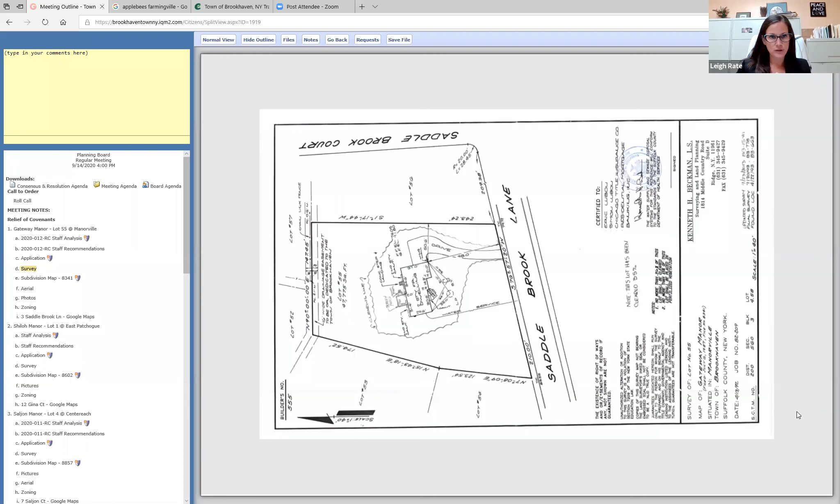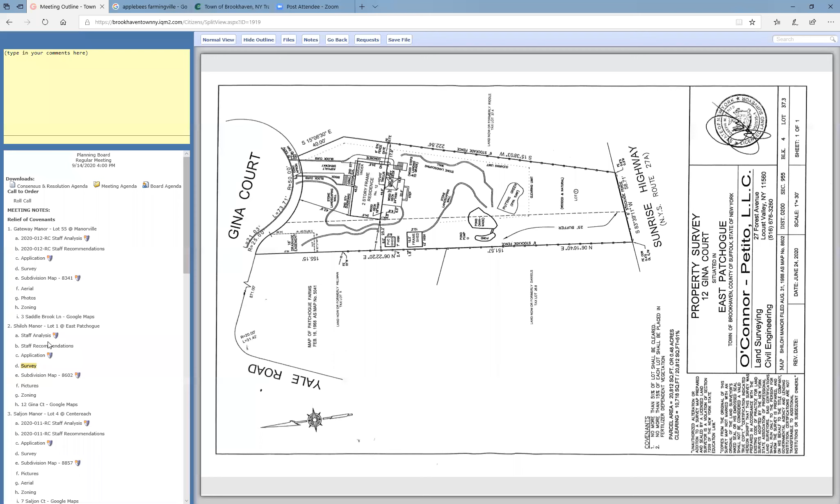Counselor, do we know if Mr. Woods is back on item number 1? I'm on item number 1 as well. Andrew Malguinera, are you representing Mr. Wood? I am.

Okay, please raise your right hand. Do you swear or affirm to tell the truth, the whole truth, and nothing but the truth, so help you God? Yes. Did you hear the staff, you have a copy of the staff recommendations? I heard. Okay, and are you in agreement with those? We're okay with that.

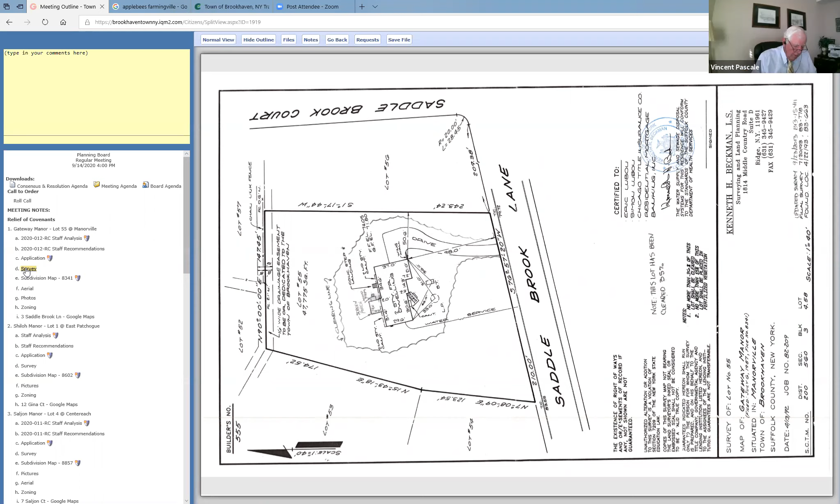Is there any board members have any questions? No. Okay, may I have a motion? Mr. Chairman, I make a motion to close this public hearing and place the matter on the decision calendar.

Motion by Ms. Dunn, second by Mr. Smith. Mr. Zarcone, I vote aye. Ms. Kelly, I vote aye. Mr. Walutis, aye. Mr. Rose, aye. Chair votes aye, motion carries 7-0.

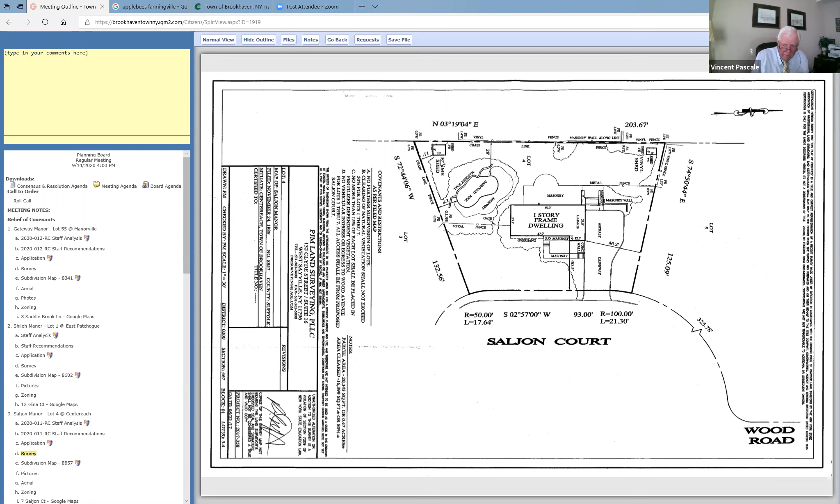Thank you, Commissioner. Is the applicant present? Mr. Malganara, you're representing this application as well? I am. Okay, did you receive a copy of the staff comments? I did. Do you have questions or concerns, or do you agree with those items? Absolutely, we're good.

May I have a motion on item number 3? Mr. Chairman, I will make a motion to close this public hearing and place the matter on the decision calendar. Motion to close by Mr. Rose, second by Mr. Smith.

Mr. Zarcone, I vote aye. Ms. Kelly, I vote aye. Mr. Walutis, aye. Ms. Dunn, aye. Chair votes aye, motion carries 7-0. Thank you. Have a good night.

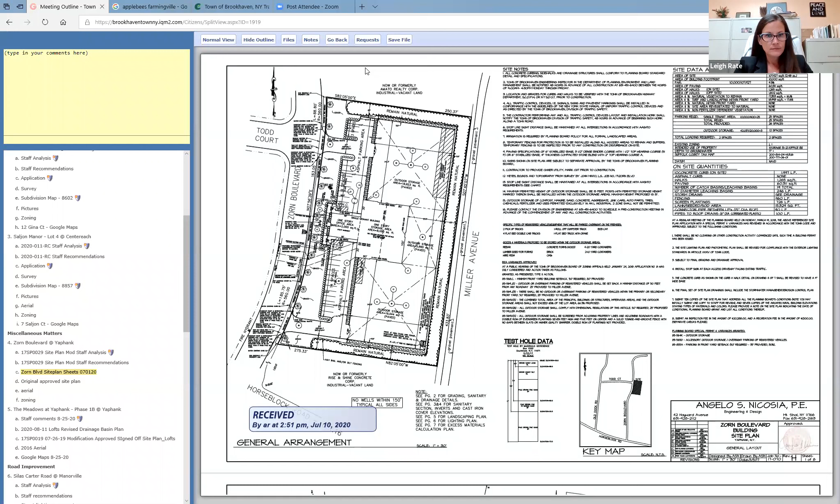Counselor, Ms. Rate? Sorry, I was on mute. Eileen Rowan is not here, I think I have Jeff Volmuth for it. I'm at least going to bring him in to ask. No, I'm actually here for the Lofts. I made a mistake, Leigh, sorry. Okay, so which number is that? Which number was a Lofts modification? Meadows, oh the Meadows, okay. I'll bring you in at that time, Jeff. Thank you, okay, I apologize. That's okay, I'd rather bring you in to make sure. Thanks. Okay, so we have the representative for item number 4.

Angelo Nicosia, is he in there, Leigh? He's the other one on the... No. I'll leave it open, we'll go on to the next one. I have someone here for 5. I don't have anyone here for number 4. Okay, let's move on to 5, I'll come back to 4.

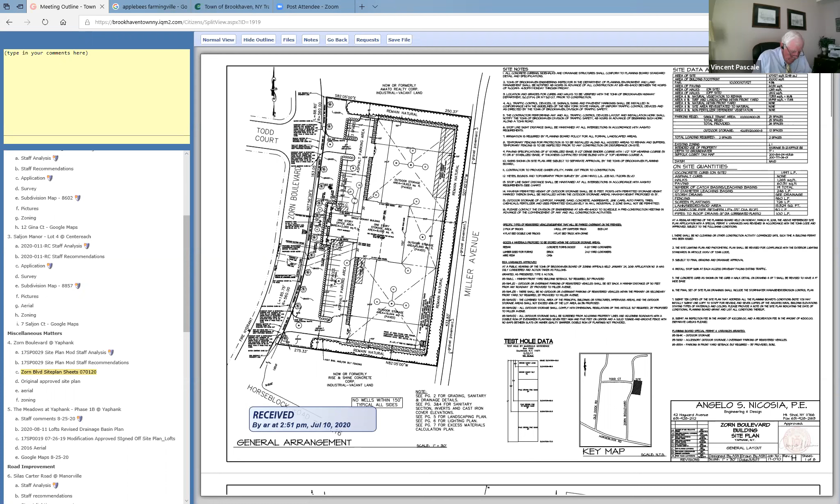The Meadows at Yaphank, Phase 1B at Yaphank. Yes, I'm here, back on again. I just want to read into the record the applicant, through the application, Mr. Bowman. This is the Meadows at Yaphank Phase 1B.

The requested modification is that the current design of the village green at the Lofts apartment community is not in conformance with the intent of the PDD zoning. The intent of the PDD zoning was to create an area with a sense of place where people can gather and enjoy the green space. Its current design is as a drainage basin, which prohibits the types of uses the PDD was looking to encourage. On the screen you can see this is the green area, and here's all your drains. The staff analysis agrees with the applicant that the intent of the PDD was to create a village green, and therefore they're recommending approval of the revised village green stormwater design modification. So that's this area. Thank you, Commissioner.

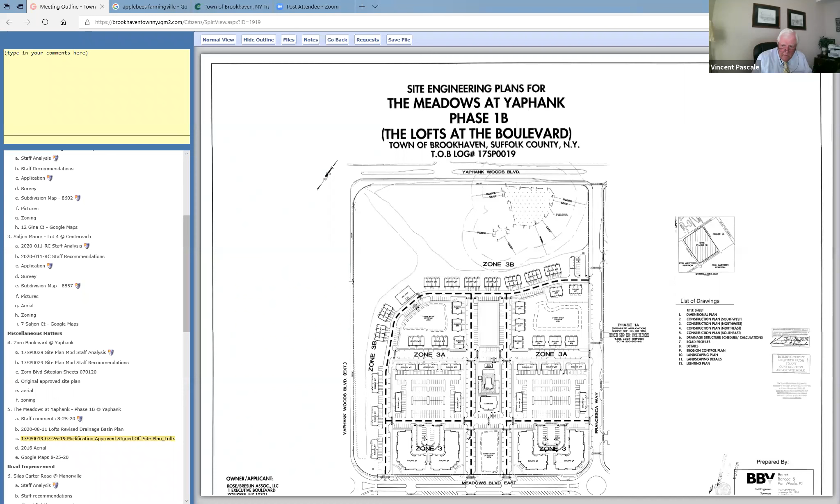Mr. Bowman, please raise your right hand. Do you swear or affirm to tell the truth, the whole truth, and nothing but the truth, so help you God? I do. Okay, you want to speak on the application? Sure, I actually thought Brian Ferrajari was going to be here. He's probably... yes, somewhere, Brian's on the line as well. Okay, he's going to probably be upset if he's not allowed to present, so let him present. No, okay. Is he going to speak? I'll be happy to, Mr. Chairman. There you go. You're not an attorney, are you? No, I'm not. Okay, well I can't see you, but raise your right hand. Do you swear or affirm to tell the truth, the whole truth, and nothing but the truth, so help you God?

Yes, I do. Okay, you want to present the application to the board? Sure, no problem. Good evening, Mr. Chairman and members of the board. My name is Brian Ferrajari from AVR Realty, representing the applicant. With me this evening is Jeff Volmuth from the firm of Volmuth and Brush, who prepared the plan revision before you. As you know, Phase 1B of the Meadows at Yaphank, consisting of 295 apartment units, is currently under construction. This phase contains a vital element of our PDD concept, that being the Village Green.

During construction, it became apparent that the design of the Village Green was not conducive to its original intent under the PDD zoning, which is to provide a sense of place for people to gather and enjoy open green space. In its current design as a drainage basin, the Village Green does not present an attractive place for people to get together outside of their apartments. In an effort to correct this, we asked Volmuth and Brush to design an alternate drainage system so that the Village Green can be raised as a level surface, creating an attractive public space while remaining compliant with the town's drainage requirements. This revised plan is the basis of our application this evening. We have reviewed the staff analysis prepared by planning and are in agreement with their findings. That concludes my presentation. Jeff Volmuth and I are both here to answer any questions the board might have.

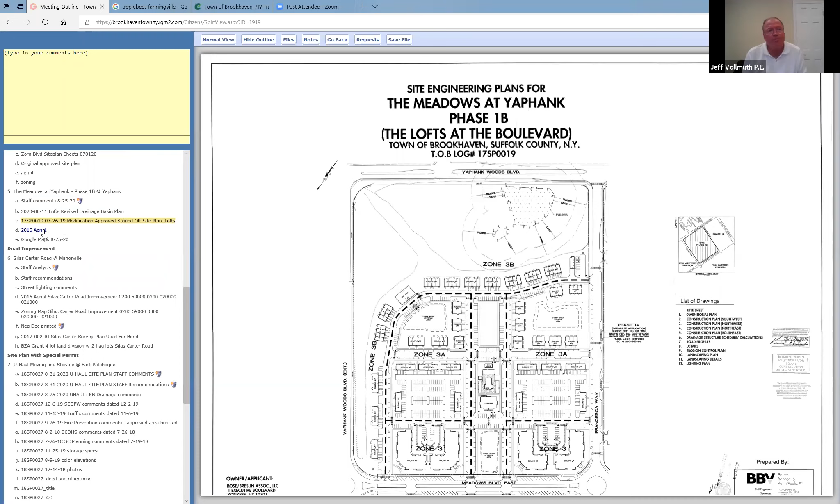Any board members have questions? A couple of questions, Mr. Chairman. This is Richard Smith. What are the dimensions of that green area? Hang on a second, I have the plan, just give me a moment.

Is it flanked by roadways that have inline parking along the sides of it? The east side is flanked by parking. Both sides have parking, parallel parking along the side of it.

It used to be a relatively shallow overflow. It wasn't a recharge basin, it was a surcharge area. So to explain the design, when the lofts was originally designed, we were limited to 5 inches of storage subgrade, providing 3 inches of surcharge flooding at grade. The 3 inches was accommodated in this low point.

So we're replacing that 3 inches with leaching pools instead, and that allows us to fill the low point. At the time, that's what staff wanted. Staff didn't want to let me provide the full 8 inches subgrade, but there's really no reason not to. And in this case, there are a number of reasons to change the way it was graded and flatten it out so that people can use it.

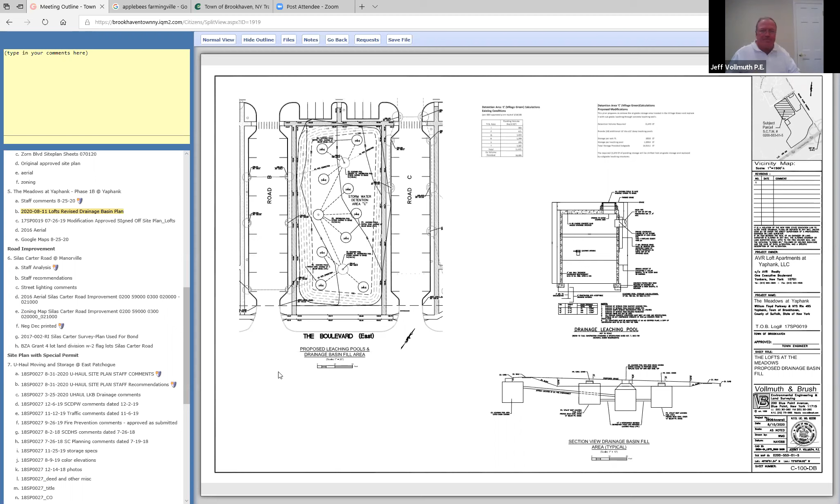Any other questions by the board? May I have a motion?

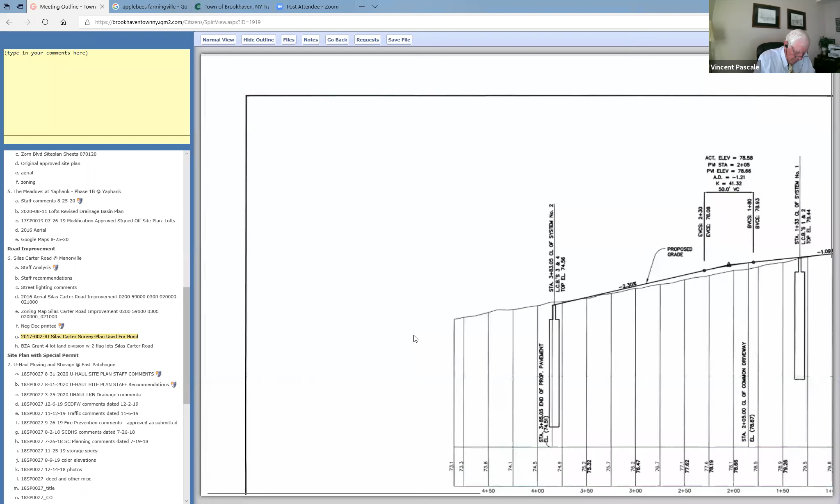Yes, Mr. Chairman, I would like to make a motion to close this public hearing and place the matter on the decision calendar. Motion by Ms. Reilly, I'll second that motion. This is Board Member Pete Zarcone, second one is Zarcone. Mr. Wilutis, I vote aye. Ms. Dunn, aye. Mr. Smith, aye. Mr. Rose, aye. Chair votes aye, motion carries 7-0. Thank you, gentlemen, thank you very much.

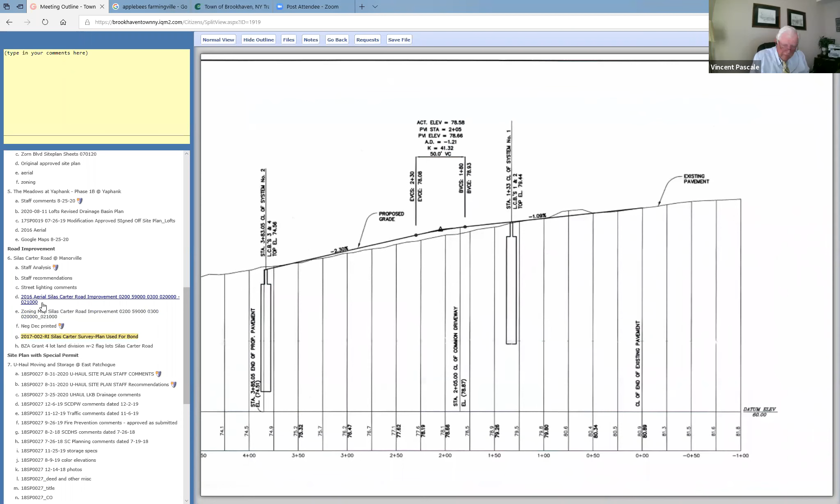Counselor, do we have the representative for Zorn Boulevard with us yet? No, I don't have anyone here for number 4 at the moment. Not available. Okay, let's move on to item number 6, Silas Carter Road at Manorville.

The location is on the west side of Silas Carter Road, 428 feet north of Jerusalem Hollow Road, which is not open. The proposal is to construct 400 linear feet of Silas Carter right-of-way to access 4 single-family homes on 10 acres. The applicant seeks road improvement approval for this right-of-way, including paving, drainage, curbing, and street lighting. Silas Carter is a paper street that has been extended over time and is currently cleared as a dirt road. Staff recommends approval of the revised plan dated 8/12/2020 with 12 conditions, including a bond submission last dated 8/25/2020.

Thank you, Commissioner. I see Vincent Pascale. Are you representing the applicant? Yes, I am the applicant. Okay, please raise your right hand. Do you swear or affirm to tell the truth, the whole truth, and nothing but the truth? Yes. Thank you. Okay, you want to speak on the application?

Well, we've had comments and it's been going on for quite a couple of years now, so we agree with all of the input from planning. I think it's straightforward, and I have an email from Eileen stating the same, so I'm in agreement with it as per the plan of Kenneth Bank.

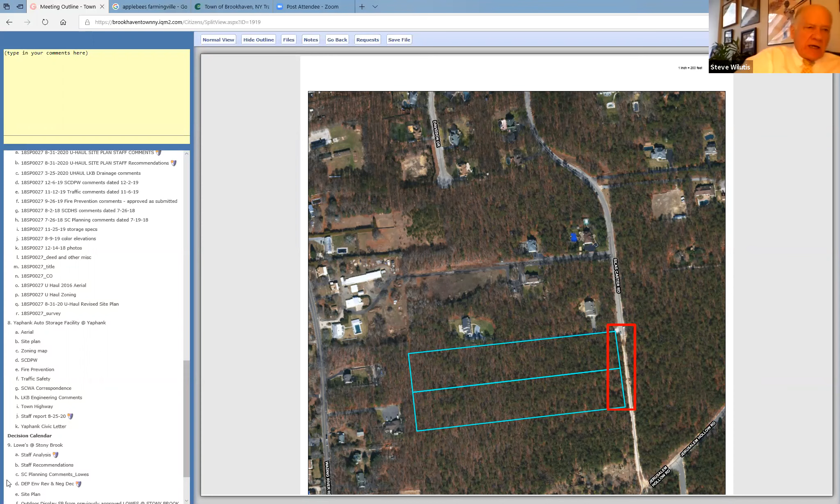Motion closed by Ms. Dunn, second by Mr. Smith. Mr. Zarcone, aye. Ms. Reilly, aye. Mr. Wilutis, aye. Mr. Rose, aye. Chair votes aye. Motion carries 7-0.

Thank you, Mr. Pascale. Thank you. Item number 7 is being held to October 19th. Item number 8, Yaphank Auto Storage Facility at Yaphank.

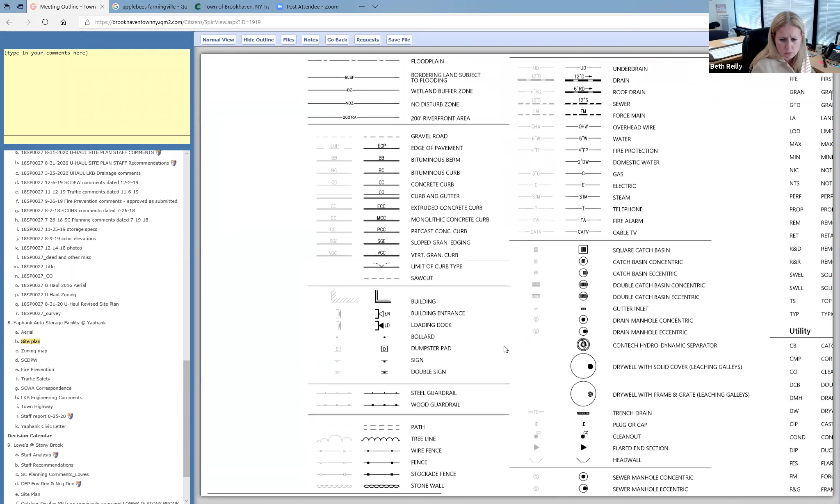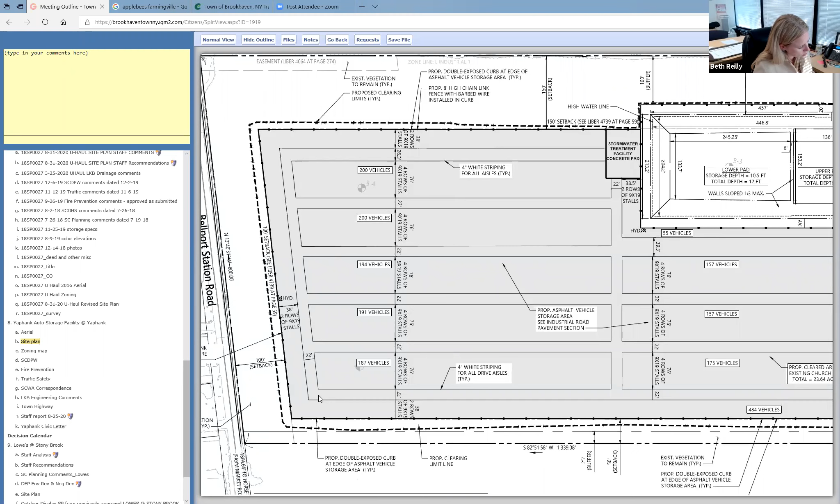There is no building proposed. Site improvements include an asphalt paved storage area with perimeter curb, a stormwater drainage collection system, and an on-site recharge basin as per town standards, a right turn in, right turn out single access drive on Sills Road, and an 8-foot high chain link fence with barbed wire around the perimeter of the vehicle storage area.

The plan proposes a 150-foot natural buffer to the north, a 100-foot natural buffer along the frontage on Bellport Station Road, a 100-foot landscaped and natural buffer along the Sills Road frontage, and a 50-foot natural buffer along the remaining property boundaries. Proposed land coverage upon completion: driveways, buildings, and pavement 21.47 acres, or 60%.

The property is adjacent to Bellport Station Road on the west, the Long Island Railroad tracks to the north, Baseball Heaven to the northeast, and Sills Road to the east. Adjacent to the south is the Suffolk County Water Authority wellfield and storage tank, and vacant wooded industrial property. It is noted that north of the railroad tracks are the rear yards of 9 residential dwellings fronting on Long Island Avenue. There is a special permit.

The criteria is contained within 85-569, and there are 12 of them. The applicant also seeks 2 planning board variances: minimum natural landscaped area in the front yard, 15% required, 7.3% provided; and parking in the front yard setback, 100 feet required, 50 feet provided at the church parking site.

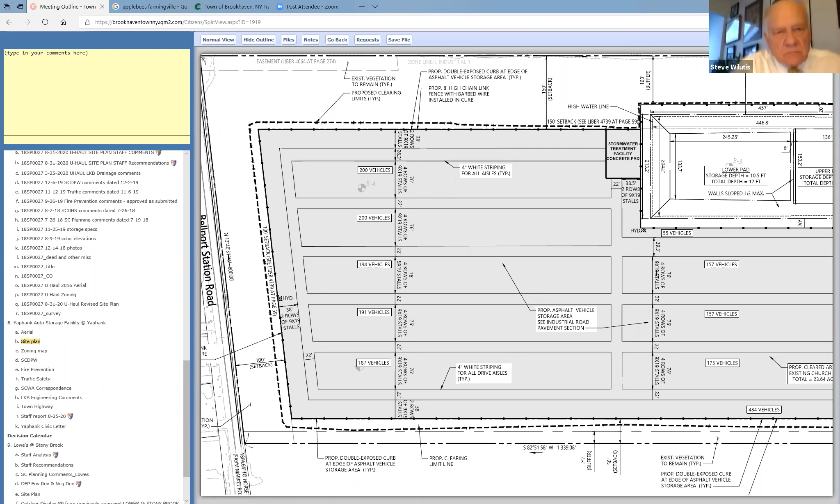The site is adjacent to Suffolk County Water Authority property, which contains the Patchogue Yaphank wellfield. The applicant proposes mitigation, including paved storage areas and a Contech hydrodynamic separator system with drainage catch basins that would collect debris and contaminants from the autos. After limited treatment, it would continue into the recharge basin where the stormwater would be recharged into the ground.

The Suffolk County Water Authority has serious concerns regarding the auto storage facility and its proximity to the wellfield, and recommended denial. Please refer to the Suffolk County letter dated November 8th, 2019. A traffic impact study was included in the DEIS. The Yaphank Civic Association has submitted a letter of objection.

A draft environmental impact statement was prepared and accepted as complete on Monday, October 7th, 2019. A public hearing was set for Monday, November 18th at 4 p.m. to consider the DEIS.

Due to comments from a November 8th, 2019 letter from Suffolk County Water Authority during the DEIS comment period and prior to the public hearing, the application was adjourned to a later date. This board adopted a request that a draft supplemental environmental impact statement be prepared. Since the 2019 DEIS, the proposed preliminary site plan has been revised, specifically concerning the stormwater runoff management system and treatment process, to provide enhanced stormwater treatment for the removal of a broad range of potential contaminants.

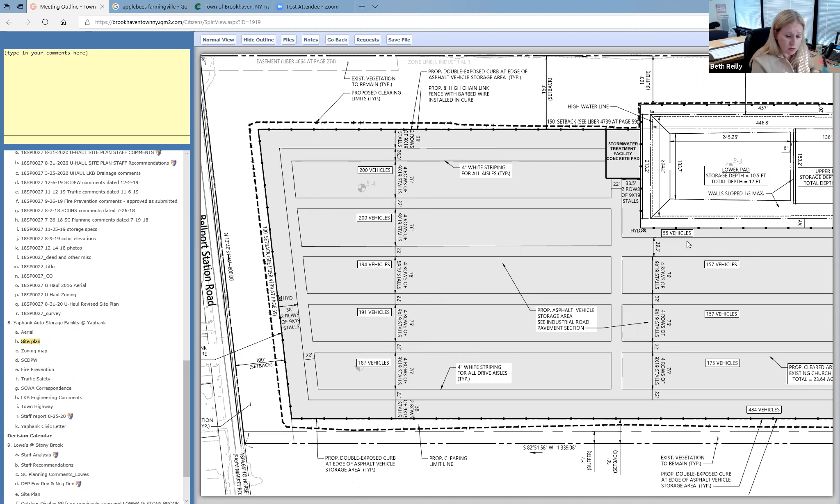So if you'd like, I have up the site plan. I have the zoning map. And any other documents that you need me to put up, just let me know.

Okay, thank you, Commissioner. Along with the letter from Suffolk County Planning, we received a number of letters. Ms. McCallion, if you're online, can you make those letters part and parcel of the public record? I'd like to make all of those records, the emails and everything, all public inquiries into this application, part of the public record.

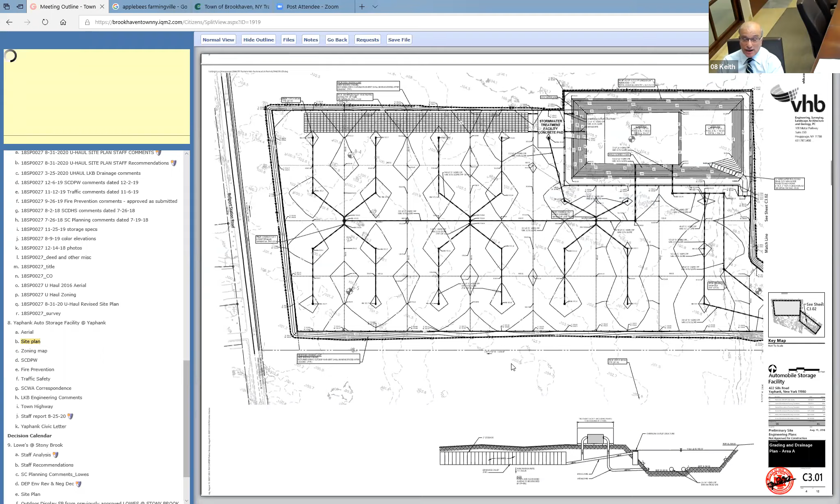Is the applicant present? Yes, he is, Mr. Chairman. Keith Archer, Harris, Bloom and Archer, 445 Broad Hollow Road, Melville, New York.

I'm representing the applicant. Good afternoon, Counselor. Good afternoon, Mr. Chairman, good to see you again. Nice to see you as well. Hope you're safe and enjoying the rest of your summer. You too, sir. Okay, now you can begin to entertain us.

Thank you very much. As I indicated, we represent the applicant in this request for approval, as the Commissioner so aptly described, of a 21-acre automobile storage facility on approximately 35 acres of industrially zoned land, bounded by Bellport Station Road to the west, the Long Island Railroad tracks to the north, Sills Road to the south, and the Baseball Heaven facility to the east in Yaphank.

The property is presently vacant other than the former Fishermen Church situated along the Sills Road frontage. The applicant's specific request, as Commissioner Reilly indicated, is for a special permit and site plan approval for the proposed facility, which will be used for the short-term storage of vehicles that have either been involved in motor vehicle accidents or been repossessed, but are otherwise owned by the insurance company and are awaiting online auction.

Those cars are auctioned online. There's no auction at the site. In fact, there are no live auctions. Minor relief is also being requested from the town's land development regulations.

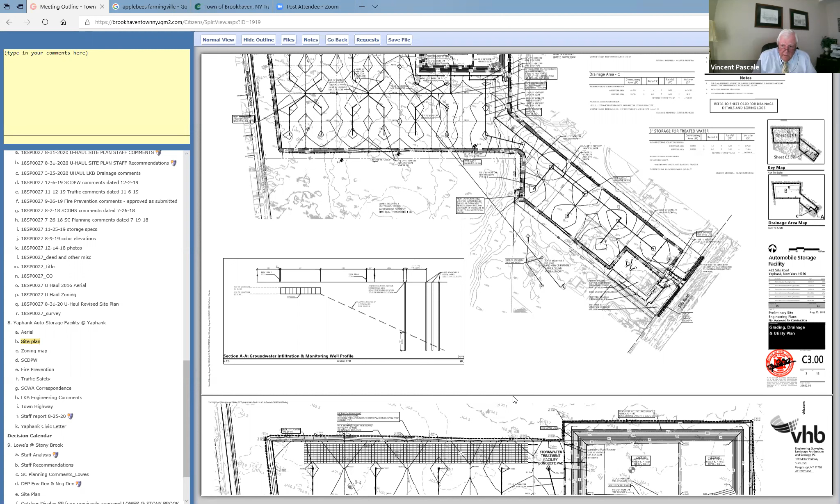Right, my scope of services is to focus on treating the water that is collected and brought to the treatment system. Anything that happens outside of that boundary, I'll hand off to one of my colleagues here. Okay, but there's also a good possibility that something not contained could spill over, so we'll let your colleague address that. Yeah, it's not my field of expertise, but yes.

Mr. Chairman, that will be addressed. If the board permits, I'd like to ask David Wortman from VHB, the preparer of the DEIS, to describe the broad scope of the DEIS, and also respond to your question. I'll also point out that we were in contact with the Yaphank Fire Department, and they indicated that they are able to cover whatever resources need to be dispersed to this property.

So if Dave Wortman can now describe the DEIS and the SDEIS, that would be great. That would be my pleasure.

Good afternoon, Chairman Pascale, members of the board. My name is David Wortman, and I am the Senior Environmental Manager for VHB in Hauppauge, New York. As you're aware, this is a public hearing on the site plan and special permit applications for the proposed facility, as well as a hearing on the draft environmental impact statement, or DEIS, and draft supplemental environmental impact statement, or DSEIS. I'll take a moment to briefly address the environmental review of the proposed project pursuant to the State Environmental Quality Review Act, SEQRA, for which this board is the lead agency.

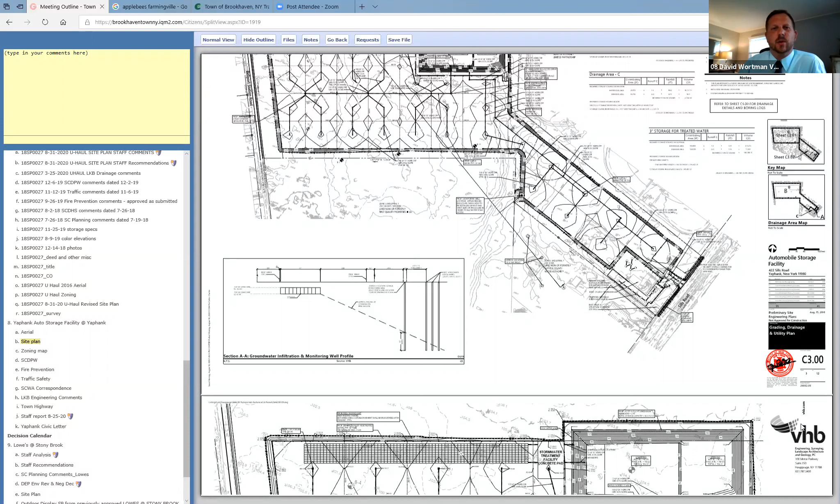Following the issuance of the positive declaration, VHB prepared a DEIS on behalf of the applicant to address a comprehensive range of potential environmental impact topics in accordance with your final scope, including potential impacts upon water resources, which we've heard a little bit about already, land use and zoning, ecological resources, traffic, which we'll hear more about shortly, aesthetics and visual resources, cultural and historic resources, noise and vibration, public health and safety, and climate change.

In accordance with the second positive declaration, the DSEIS comprehensively evaluated those topic areas, and a notice of completion was issued in July, accepting the draft supplemental document as complete and adequate for public review, which brings us here today.

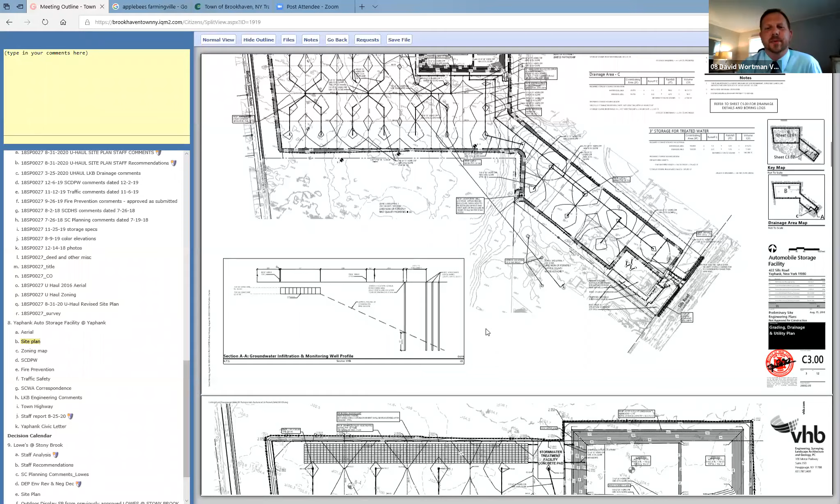The results of the various detailed analyses in both the DEIS and the DSEIS indicate that the proposed action has incorporated measures to minimize or eliminate potential impacts to the point that it would not be expected to result in a significant adverse environmental impact.

An important part of what we're here to do tonight, rather than to present, is also to gather substantive comments on those analyses contained in the draft EIS documents, which in accordance with the SEQRA process will then be addressed systematically in a final environmental impact statement, or FEIS.

So to that end, I'm not going to attempt to summarize all the results of those various analyses. They're available to the board, and they've been distributed by the town to all the involved agencies and interested parties, and they're readily available to the public. Instead, I just want to briefly highlight some of the key aspects of the DEIS and the DSEIS.

First, with regard to land use and zoning matters, the subject property is located within an expansive L Industrial 1 zoning district, which extends for long distances to the east, south, west, and northeast of the subject property, encompassing much of the Yaphank area of the town of Brookhaven. The district is extensively developed with numerous industrial uses, including various existing auto-related uses, light manufacturing, warehousing, distribution facilities, pharmaceutical facilities, offices. There's even a power plant.

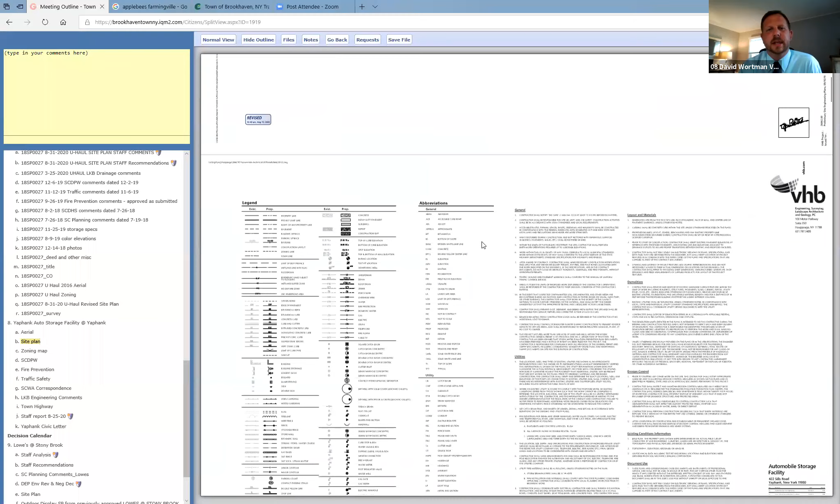The key elements of the proposed action is the retention of substantial areas of natural vegetation in the form of perimeter buffers that meet and exceed the respective land development standards for this site. Mr. Buttacavoli will explain that a little further when he describes the site plan.

But specifically at the west along Bellport, at the avenue frontage of the site, there's no driveway access proposed, and a 100-foot natural buffer is proposed to be retained. As you know, the site is currently wooded, so that 100-foot buffer will retain the natural vegetation and will virtually eliminate the potential for the proposed facility to impact the visual character of the surrounding areas there.

To the north is the Long Island Railroad corridor, followed by a relatively narrow A Residence 1 zoning district, approximately a quarter mile in width. That district is surrounded on three sides by that same L1 industrial district that our site is in, and on the fourth side, the north side, by the Long Island Expressway corridor.

To further minimize the potential for adverse effects on that district specifically, this proposed site plan increases the natural buffer at the north to a minimum of 150 feet, also virtually eliminating the potential for adverse effects on that portion of the surrounding neighborhood.

To the south of the subject property are additional industrially zoned properties, including a large undeveloped wooded parcel, the Suffolk County Water Authority water storage tank and wells that we've talked about, and a private learning center, a new interdisciplinary school, which will also be well buffered in accordance with the town's development standards.

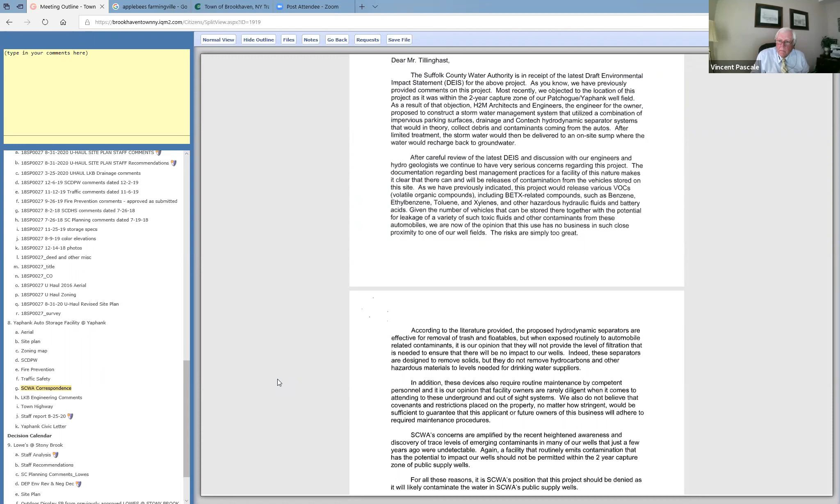Mr. Chairman, Dave Buttacavoli of VHB. VHB prepared the site plan displayed in front of us. Now that we have the background from our experts, I'd ask Dave to describe the site plan. The site plan changed from its initial submission date to the time we submitted the supplemental DEIS. I'll ask Dave Buttacavoli to describe that, because what changed was to facilitate the system Dr. Woodard described. Dave will describe the location and changes made, as well as some general site information we haven't already covered.

Dave? Dave, we can't hear you. Mr. Buttacavoli, please describe the plan. No, we see you, can you hear me? Yes, yes. Back? Okay, good. All right, I'll start again.

Good afternoon, Mr. Chairman and members of the planning board. My name is Dave Buttacavoli, and I'm a principal at VHB Engineering located at 100 Motor Parkway, Hauppauge, New York. As my colleagues just went through a number of the site features and issues addressed in both the documents and prior plans, I won't rehash what's already been covered, but I want to talk about the access and the buffers, and then get into the stormwater system and what Keith was alluding to when he talked about the changes.

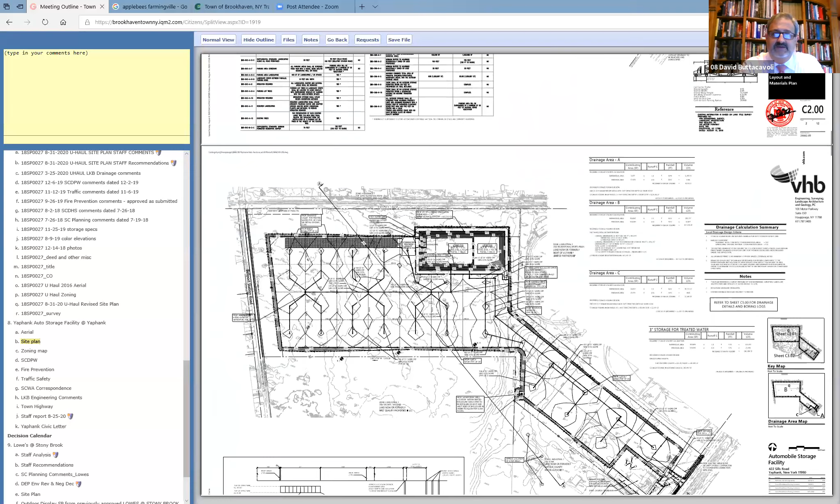So the decision was that the asphalt areas -- Beth, if you can go to the next one, the drainage plan, it should be in the set -- shows a number of different areas. Essentially the water is collected in catch basins. Stepping back, it's asphalt, and all the asphalt is pitched, as all asphalt is, to move the water to a location. Each of these areas collects water in catch basins, which are a closed unit. The water doesn't go anywhere; it goes into the unit and then through a pipe network.

Those networks then go into oil water separators, which both Steve and James chatted about, where things will be settled out. Once the water passes that, then it goes up into the basin.

That's the product of what Keith mentioned to change. Although it looks like a recharge basin, it's actually a lined basin, so nothing is recharging out of it. What's happening is the water flows into that, and then it's pumped up from the western side of that basin.

And then water is going up into the treatment center. It's being treated, then it discharges out into these leaching galleys. The leaching galleys are similar to dry wells or any other leaching galleys, but what we're actually leaching out is going to be almost clear reverse osmosis water, for all intents and purposes, to go back to what they talked about.

So the system itself and how it works, and one question, Chairman, is if there's over spray on certain areas. For the areas that are within this, anything that flows from here flows into these catch basins and gets to the same network, out to the same system, and then goes to the treatment facility.

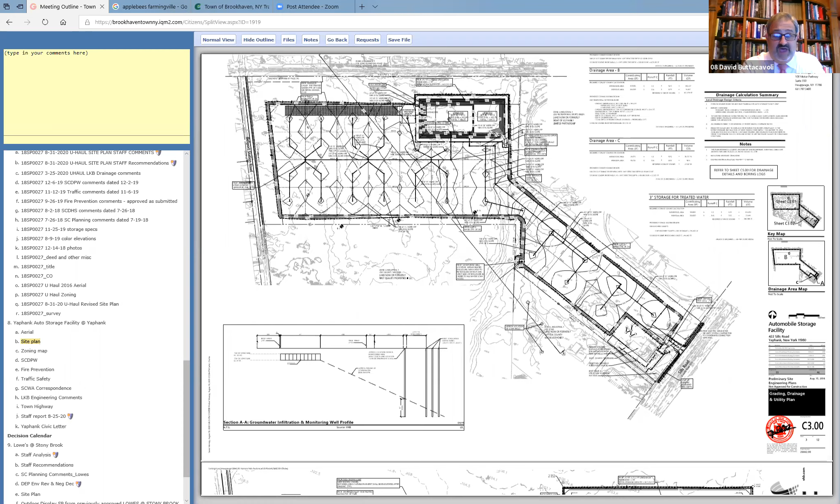So with that, I know there's going to be questions regarding the water, but I do want to just introduce Pat Lenahan so we can chat a little bit about the traffic.

I think that's it. Isn't asphalt more vulnerable to this type of contaminant or vehicular agents? So the asphalt itself, there are other additives we can put into it. But I would have to look and get back to you if there's something specific out there that would make it even less vulnerable.

Other than that, we could take some areas directly around the catch basins and make them concrete. I wouldn't suggest a whole lot that way, but there are certain points we could do that. I'd have to see if there's anything further regarding the asphalt.

Pat, you're up. Thank you, Dave. Can everybody hear me? Yep. Okay, good afternoon. I guess we're still afternoon.

Chairman Pascale, members of the planning board and staff, my name is Patrick Lenahan. I am the director of the Transportation Division at VHB's Long Island office in Hauppauge. As part of the draft supplemental environmental impact statement prepared for the project, VHB performed a detailed traffic impact study.

to evaluate potential impacts to transportation associated with the proposal. The TIS is included as an appendix to the supplemental EIS and was performed in accordance with the final scope of the DEIS and in keeping with standard traffic engineering practices and procedures.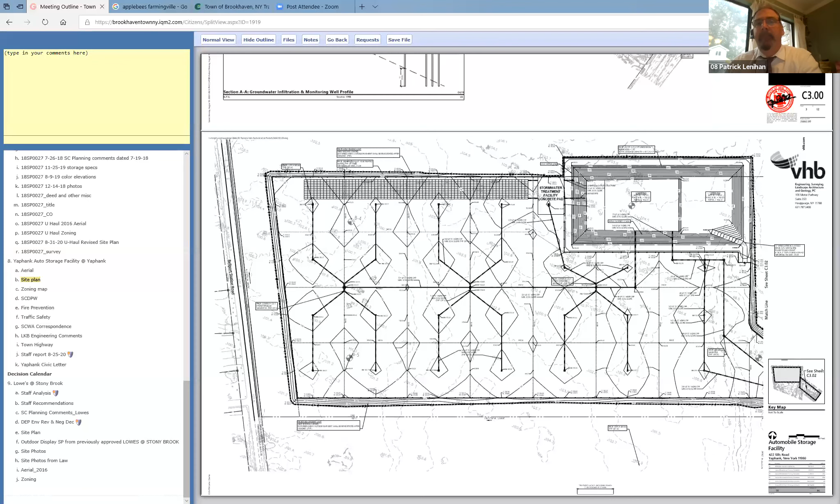The TIS evaluated elements such as existing and no-build traffic conditions, traffic safety, site access, future volumes, and capacity. The traffic study was accepted as part of the overall document for circulation and public comment and included review by town staff and the town's traffic consultant.

As per the final scope, the study evaluated a total of 23 intersections. We did submit a graphic on an aerial background that had a series of red and blue intersection dots. If that's available, that would be great.

If not, I would describe the scope of the study as the length of Sills Road from Bellport Station to the LIE, County Road 16 Horseblock from Bellport Station down to Sunrise Highway, Station Road from Sills down to Sunrise Highway, and a couple of intersections on Bellport Avenue, that's Long Island Avenue, and the south service road of the expressway. Those were included in the scope as there was concern expressed by the neighborhood on Bellport Road.

But I did want to mention that there is no access, as Dave said, on Bellport Avenue. In addition, there is a truck restriction on Bellport Avenue north of Horseblock Road.

So there will be virtually none of our traffic and absolutely none of our truck traffic that would even consider using Bellport Avenue. So based on the specifics of the operation of the site provided by the developer, it's been found that the operation as proposed will not cause significant negative impacts to traffic conditions on these roadways or at these intersections.

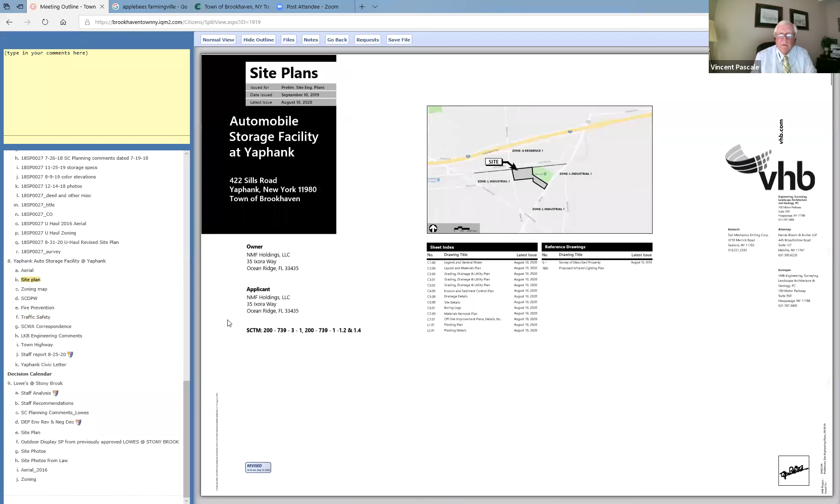I see a number of attendees. I don't know what they're related to. I've let Jean into the meeting. She had Jean Forster. Is your mute on? No, it doesn't appear to be.

Hold on just a moment. All right, I'm going to take Jean Forster out for the moment. She's from the Civic Association. She had some expert testimony that she wanted to bring in.

So give me a moment and I'm going to let someone else in for the moment. I didn't do that, did you? Okay, I'm not surprised. All right, Kathy. I have someone named Kathy that I've brought in at her request. Don't see them either.

Ms. Forster, I have you in the public meeting. You're sending me a message. I have you in the meeting, but you are not. We have you off mute and don't see you there. I'm going to try this. There's someone named Rachel May that I'm allowing into the meeting.

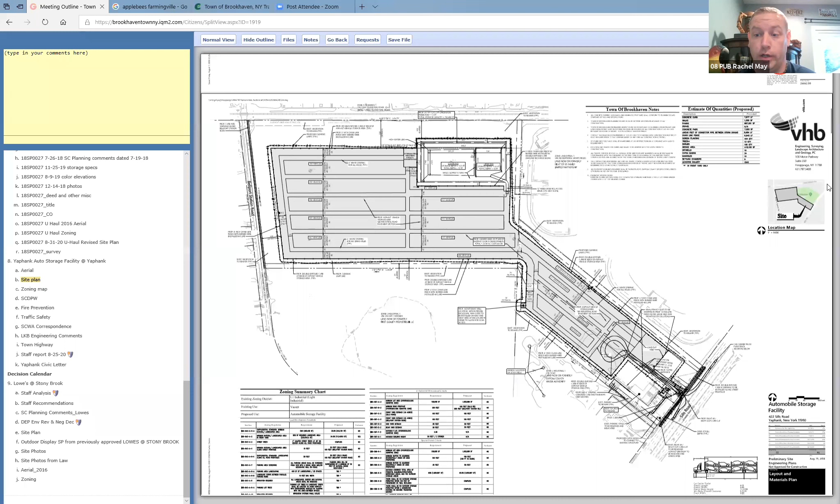All right, thank you, Mr. May. Regarding your concern about lighting spilling into your bedroom windows, you might want to contact the town, because the town has a code for dark sky compliance. If they're spilling light into your property, you should notify the town, they can check that out for you, okay? Sure, thank you. All right, thank you.

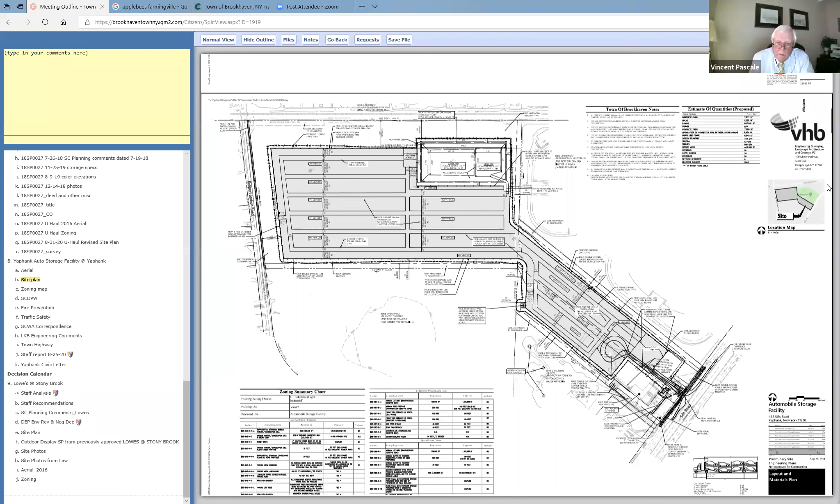Good afternoon, Ms. Lupfer. Can you please raise your right hand? You swear or affirm to tell the truth, the whole truth, and nothing but the truth, so help you God? I do. Okay, go ahead.

I've listened to your presentation, and just as the prior speakers, my neighbor Mr. May, and the other woman, Ms. Coleman, stated, traffic in our area has been adversely impacted by the other storage facilities that have been built over the past years here. And I heard what they said as far as access being only allowed on Sills Road, but I have questions regarding that too.

Especially since they did consult with the Yaphank Fire Department, in the event of a major emergency with one entrance in and out, how many emergency vehicles, number one, get into that facility since it's such a large parcel? Number two, I didn't hear, I may have missed it.

Is there any security planned for this facility? Because the one that Mr. May spoke about, which is directly behind us, we're on Long Island Avenue, and there's a facility directly behind us on the south side of the railroad tracks. They have some sort of security that patrols there 24 hours a day, it appears. And as he stated, the lights are on 24 hours a day.

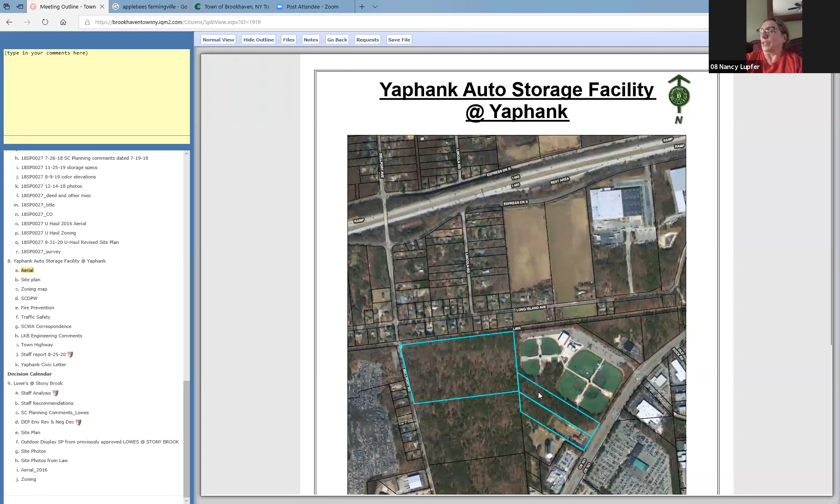Another major concern is - oh my goodness, my mind is blank - auctioneering. This was never proposed initially as a storage facility, but rather an auction house for the cars. So I wonder if now it's just being called something else and there will be auctioning going on. And many of the residents and neighbors were concerned about the sound quality and effects that it might have on the neighborhood. So I don't know if any of that stuff has been addressed, and I just missed it.

Well, when you complete it, when we come back, the applicant's gonna have to answer those questions. I'm sure Mr. Archer is taking notes as you're speaking.

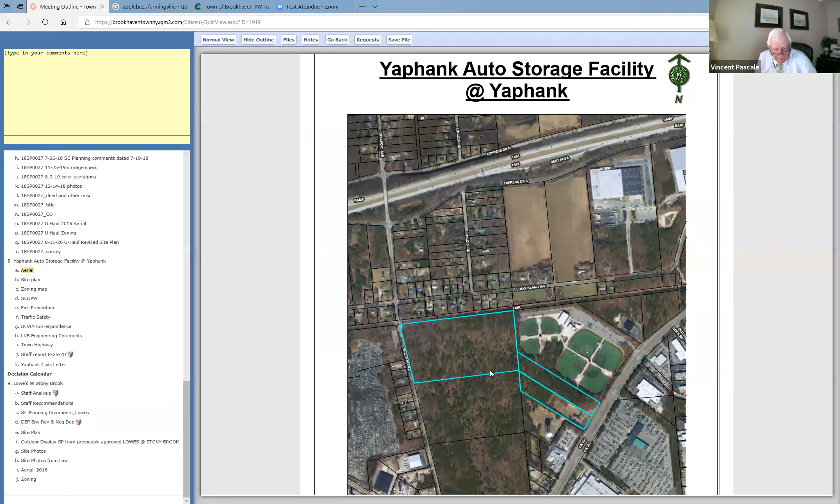Okay, and here on Long Island Avenue, some years ago, because the rate of traffic and the speeds that come down our street are so high, I applied to the town and it was approved to have the speed limit reduced to 35 miles per hour. I really wanted no truck traffic access on this road, and all that they were able to facilitate was no truck traffic except local deliveries. My question is, do they consider cars being delivered there as local deliveries to this storage/auction facility?

Very good question. That's a good question. We'll let Mr. Archer answer that.

You know, when I really requested that years ago, I asked that question and no one could really provide that answer for me. Because I think, right after Superstorm Sandy, I saw so many car carriers coming off the expressway, coming off Sunrise Highway, and cars were being placed in so many areas here in Brookhaven, Bellport, Medford. And I've always wondered for years now where those cars were sitting and what was the purpose. And it appears that now we're starting to see what's happening with all these cars.

I mean, as you guys well know, Gershow has taken over acres and acres of property just south of the Long Island Railroad here in Medford. And those cars sit there like they're waiting to go into some kind of battle. And I'm just curious, as a resident, what is really truly happening here? If anyone could really be honest.

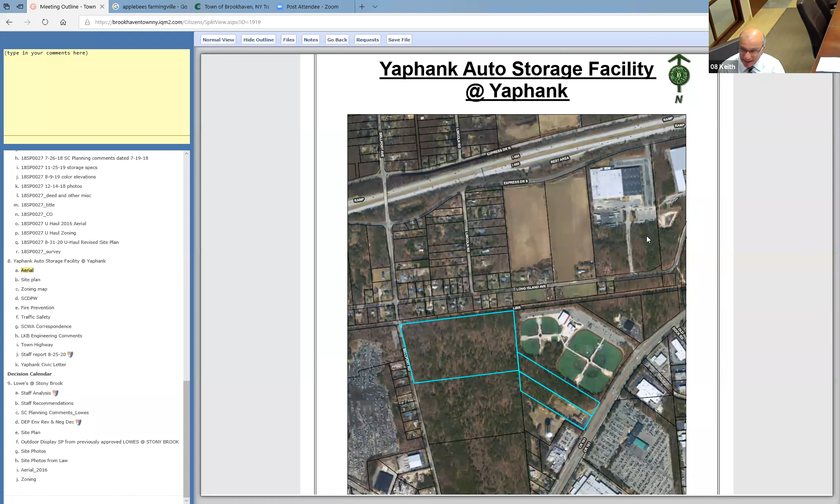Thank you, Lee. My second question is, it looks like according to the calculations, and you can tell me if I'm wrong, you have space for 2,416 vehicles? You know, when you do these EISs, you always look at what the max is. I'm not saying there are going to be that number of cars, Mr. Smith, but the requirement is that you look at the worst case scenario. I don't believe anyone believes there'll be anywhere near that number of cars, but it's in the EIS as the max, because that's what the EIS requires. Yeah, but there's no expectation that there'll be that number of cars.

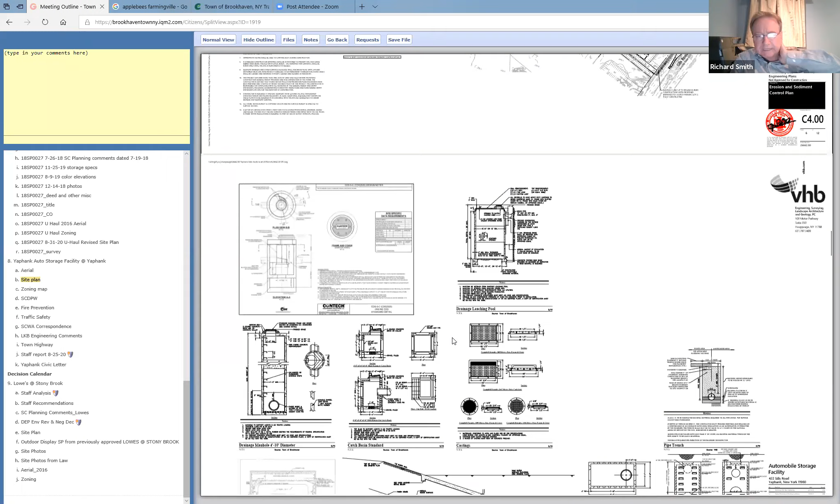I just counted the amount that was shown on that particular drawing. I think part of my question was answered. Somebody answered how the fluids are collected. Apparently the entire lot is going to be paved with asphalt, and then it's going to be pitched towards drains that go into a closed system, a sealed catch basin, and then into a treatment plant. But someone else pointed out that asphalt can be somewhat porous to certain materials. I just wanted to make note of that.

The condition of the vehicles coming here, what do you think the percentage is of cars coming here that are going to be damaged? Or are they just going to be regular insurance claims or what? From what I've seen in most of these sites, a lot of these cars sometimes are severely damaged.

I'm going to give you the information that I know. I think it's going to be a mix, Mr. Smith. I can't quantify the percentage of cars that perhaps would have been in some sort of accident versus those that were repossessed, or for some reason the dealer was assigned to the insurance company to auction it off. Unfortunately, I don't have that kind of breakdown. So that's sort of what you have: cars that have been possibly repossessed, some that may have been damaged, and some that are just being sold off. I think that's right. I think it's a mix.

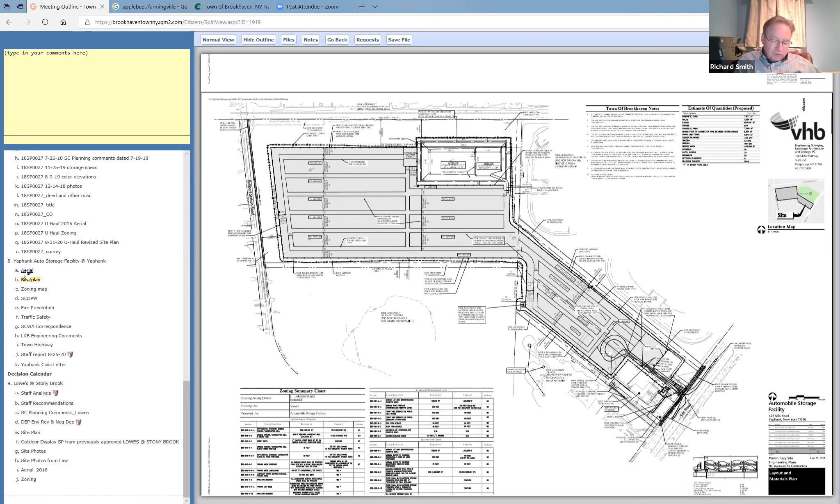I think it's a mix, and I can't quantify what percentage is allocated to each. I give this question to you and possibly other folks in the town who might know the answer. The three lots to the south of the lot you're looking to develop, do we know who owns those lots? Does your client own those lots, or are they under any type of site plan or thoughts at this present time?

I'll be happy to answer that, but Lee may know more than I do. To my knowledge, those three lots are not part of this application, and there is no application pending on that property. We happen to know who the owners are, only because one of my law partners knows them, and I can tell you there is no relationship between the applicant and the owner of those three parcels. So your applicant does not own those parcels. There are other people, and from the best knowledge right now, there are no pending site plans or thoughts on those particular parcels. Not to my knowledge. Lee or Beth may know better, but to my knowledge, absolutely not.

Mr. Archer, there was a couple questions by the public, specifically Ms. Leffer, who was concerned about security. You plan on having manned security at the site? Sure.

So first of all, you're going to have an 8-foot high fence surrounding the property, and there will be thermal imaging cameras going 24 hours a day. The gates will be locked except when access is needed off of Sills Road, but there'll be cameras going 24 hours a day. But no physical security guarding the site, no trucks driving around for security? I don't believe so, Mr. Chairman, only because the cameras are going to be monitored.

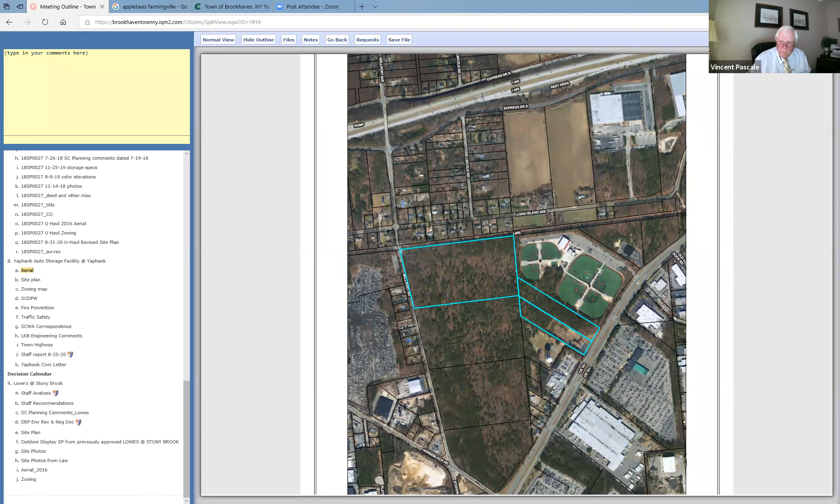But I'd like to bring a commissioner in if you have any questions or concerns. So I'd like to add on to Mr. Zarcone's question, not only about fuel, but all fluids drained from all of the vehicles before they get on site. So if you could get us that answer.

Mr. Lenihan, I have a question for you about the trucks. Has there been a truck route plan submitted as part of the site plan application? I don't believe there is a truck route plan, but the truck routes are described in my traffic impact study. If the town would like to see a truck route plan, it's something we can certainly develop from that information. Okay.

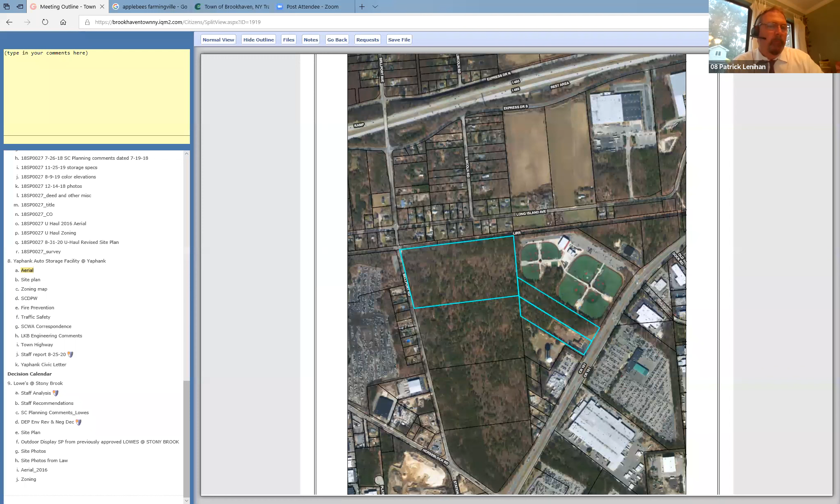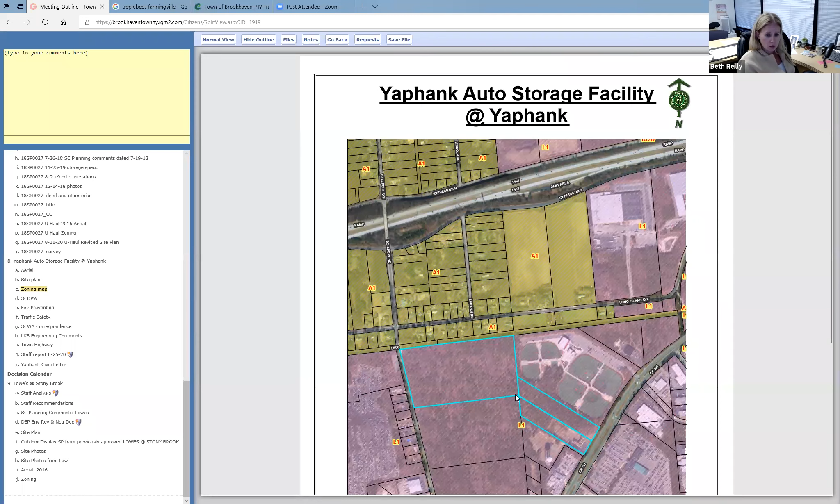And then I have a question for Mr. Wortman regarding his discussion about the zoning. You described it as being industrial, but what about all of that residentially zoned property to the north that immediately abuts this subject site?

I mean, isn't this area also residential? Right, thank you. Yes, I think I did try to describe this thoroughly, to acknowledge that there is an A1 residential district to our north. If I'm referring to the figure on the screen, if this were to zoom out slightly so we're not so concentrated on our site, you would see that the L1 district we're part of extends for long distances in all directions except to the north. There is what I described as an A1 residential zone north of the railroad tracks, south of the LIE, that is kind of surrounded on three sides by the L1 district we're in.

As far as addressing the character of that area, my testimony described that we would be well buffered from those uses to the north. That's true with respect to views into the site. A 150-foot buffer would be provided of natural vegetation, and you can see even from this aerial it's relatively mixed between deciduous and evergreen vegetation, so whatever's there is likely to provide a fairly substantial buffer.

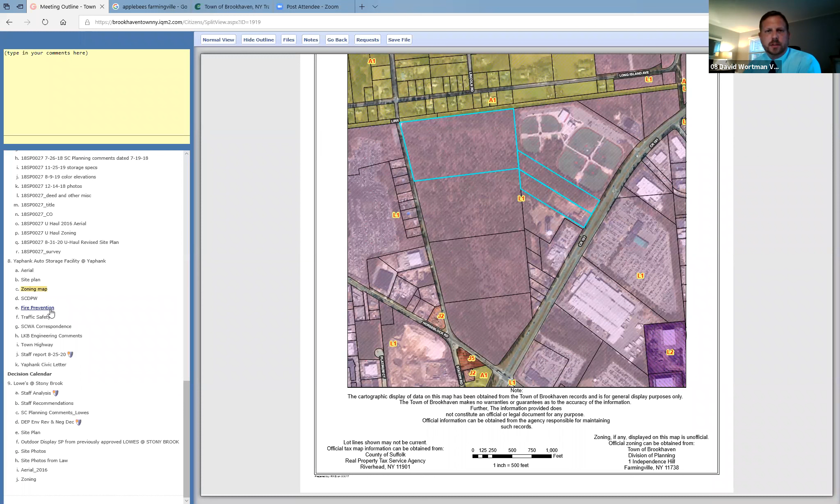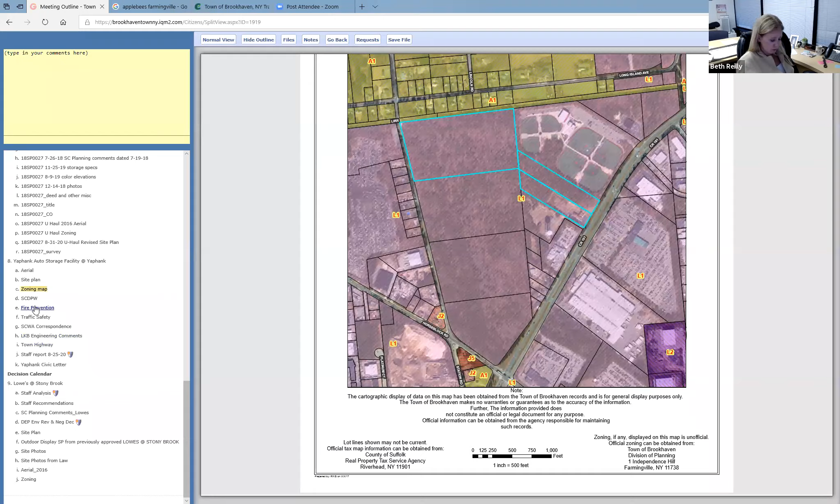And you also mentioned the fire prevention letter, and I think I had put it up from September of '19. Has the Division of Fire Prevention seen the amended site plan that we're now looking at?

The date of this letter predates the most recent design, so this was associated with a somewhat older version of the site plan. The changes made in that interim period were really associated with the conversion of that recharge basin to a lined retention basin, and the addition of the stormwater treatment system, which is a small contained unit adjacent to that. Most of the rest of the site plan remains as it was before, proposing basically the same footprint, land use, and design of the facility otherwise.

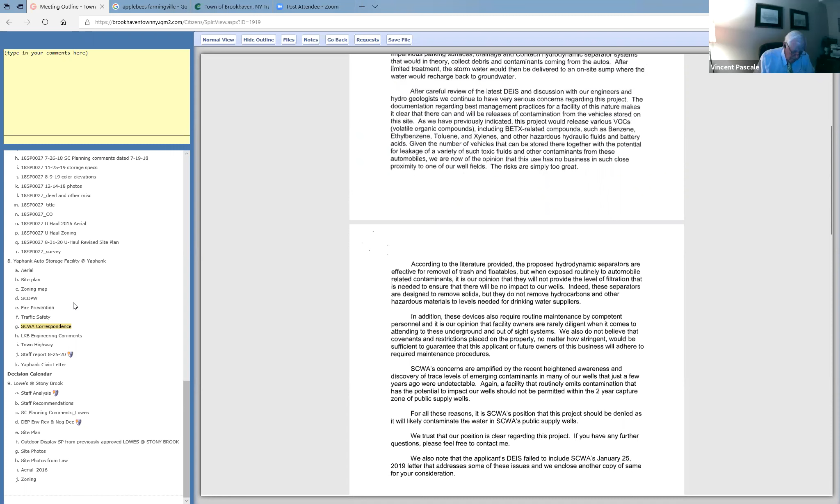I have a motion by Ms. Kelly, seconded by Mr. Zarcone. Mr. Walutis? Aye. Ms. Dunn? Aye. Mr. Smith? Aye. Mr. Rose? Aye. Chair votes aye. Motion carries 7-0.

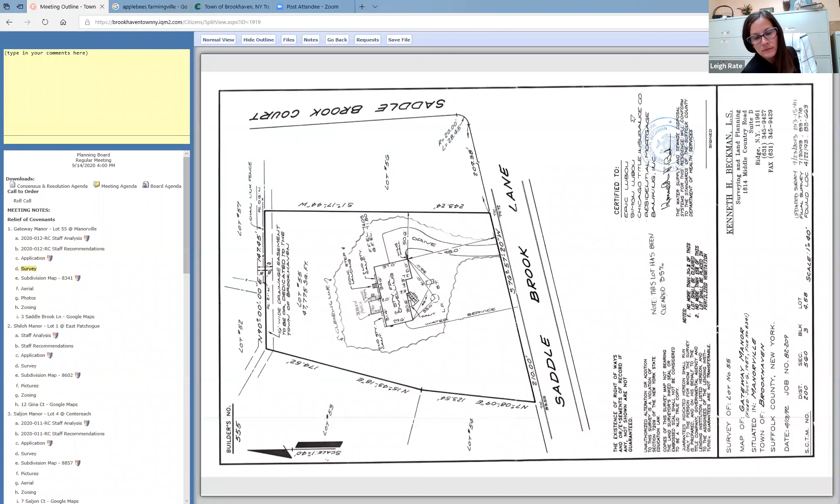Item number 7 is being held to October 19th. The motion was made on Yaphank Auto. On decision calendar, counselor, are we working on the findings on that yet? Yes, I'll get them done for the next one. Okay, so we'll do that on decision calendar. Anything the board would like to ask before we adjourn?